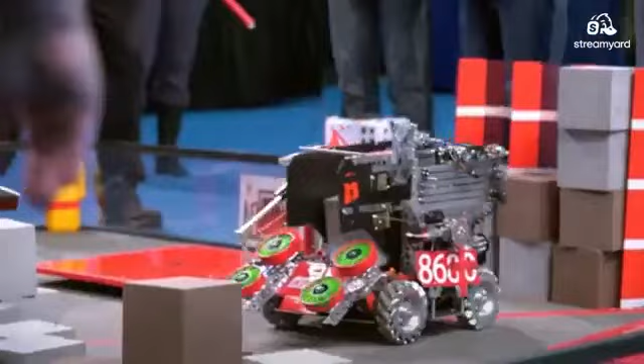Here they release a new challenge. Once you get the challenge, you figure out your game plan. Teams use a reusable kit to program robots in a variety of coding languages.

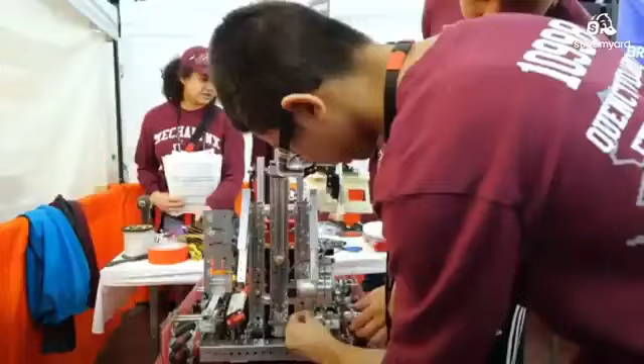Every year you also learn more and more about coding, so your code gets better and better. Personally, I do not learn by hearing about it, hands-on is just go into it. Instead of saying, oh, I know how to build this robot, I can say, I built this robot.

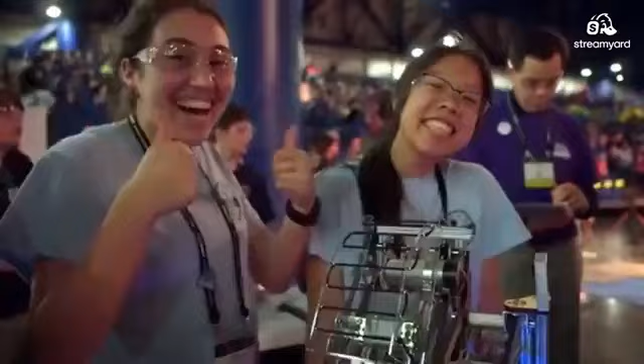In First Tech Challenge, students are developing a broad range of skills: manufacturing, hardware, troubleshooting. But there's also a lot of things you learn that you wouldn't necessarily think about, like people skills, problem-solving skills, helping one another, helping other teams.

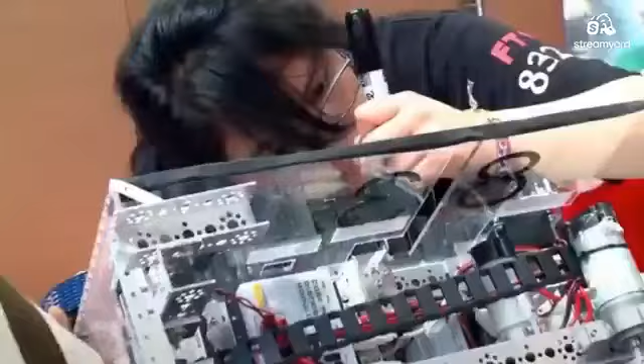The program draws so many students who just want to do the marketing, who just want to do fundraising. And that's a great thing that kids learn very early on. The model of FIRST has provided incredible opportunities for students to interact with professionals.

Whenever I asked my mentors a question, they always flipped it around and asked, where would you find the answer to that question if I weren't here? They slowly built my confidence up so much that we weren't asking them questions anymore, we were just going.

Each team has to compete at a local event, win awards at the local event, and then they're able to move on to the First Championship.

You walk into the room and there's that smell, the smell of robots. 3, 2, 1. There's different languages, different culture. It's just the best thing ever.

There are scholarships for colleges, universities, as well as technical programs. I think it's incredibly important for youth to see careers in science and engineering as a possibility for them.

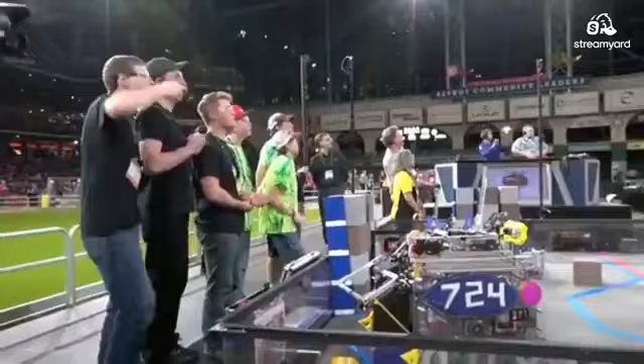First Tech Challenge is like an avenue for me to express my creativity with like-minded individuals who later become my friends through the program.

First, in one word: wow. Fun! First is inspiration. First is amazing. First is hope.

Okay, so yes, first is amazing and amazing.

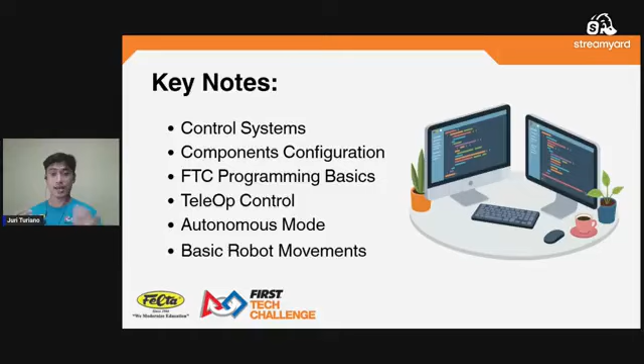I want to give you a coaching principle right now that applies to every topic we discuss today: always check for foundational understanding before advancing to the next layer. If the student does not know which port their motor is plugged into, their code will not make sense to them, even if the syntax is correct. Coaching this material is as much about diagnosing gaps in the foundation as it is about teaching new content. Keep that lens active throughout today's session.

So let's move on to control systems. This covers the hardware brain of the FTC robot, specifically the Rev Control Hub, and the role it plays in everything the robot does. A coach who deeply understands the control hub is a coach who can troubleshoot almost anything that goes wrong on the robot, because every motor, every servo, every sensor, every line of code ultimately flows through this one device.

Physically, the control hub is a compact rectangular board about the size of a thick smartphone that mounts directly onto the robot's frame. Do not let the size fool you. Inside is a real embedded computer: a quad-core ARM processor, 1 gigabyte of RAM, 8 gigabytes of storage, running an Android-based operating system. This is not a toy controller. It is a capable computing platform designed and packaged specifically for educational robotics, and it runs real software that your students write.

The control hub performs five distinct roles simultaneously, and I want you to be able to name all five. First, it is the robot controller computer, executing the op mode programs your students write in real time during competition. Second, it is reading motor encoder feedback. Third, it provides sensor interfaces, with ports for digital sensors, analog sensors, and I2C sensors, allowing the robot to sense its environment.

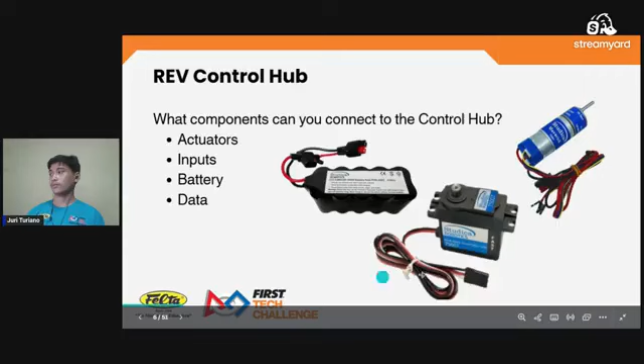So let's move on to the parts of the Rev control hub, or the port reference diagram. This diagram is one of the most practically important references in today's entire session. I strongly recommend that coaches print this diagram and post it in their build space. Students will need to refer to it constantly during both the hardware build phase and the software configuration phase. Let's walk around the diagram systematically.

On the left side of the hub, we have the motor and encoder ports—four of them, numbered 0 through 3. DC motors plug in here. The encoder cables from each motor, the thin cables that carry rotation count data, also terminate at these ports.

The port number you use here becomes the foundation of your software configuration when you create the configuration file. You will assign a name to each port number. That name must be used exactly in your code.

Along the bottom edge, we have servo ports—six of them, numbered 0 through 5, with a 5-volt power rail alongside them. Servos connect here. Unlike motor ports, servo ports do not carry encoder feedback. Servos are controlled by position signals, not by shaft counting.

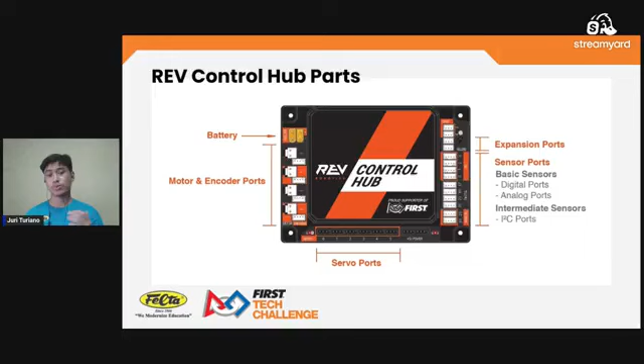Here's a coaching exercise I highly recommend. Before your students write a single line of code, sit down with this diagram and physically trace every wire on the assembled robot from its component back to its port. A student who can look at any motor on the robot and say, that is the left drive motor, it is on port 0, and it is named left motor in the configuration, and my code uses the exact name, has a complete mental model of the hardware-software chain. That mental model is what makes troubleshooting possible.

Now let's move on to the technical specifications of the Rev Control Hub. This slide lists the technical specifications of the Control Hub. You do not need to memorize these, but I want to highlight a few that have practical implications for coaching. The Rev Control Hub has a processor, an RK3328 quad-core ARM Cortex A53. This is the same class of processor used in budget Android phones. For the scale of the FTC program, this is more than adequate.

The processor is never the performance bottleneck. When students say their code is running too slow, the cause is almost always logical errors or inefficient loop structure, not hardware limitations. The Android-based operating system is important context for understanding why FTC programming tools work the way they do.

The blocks editor and the onboard Java both run in a web browser hosted by the control hub itself. You access them by navigating to a specific IP address on the hub's Wi-Fi network. This means your programming laptop does not need any special software installed, just the web browser. The Rev hardware client is the only desktop application needed.

The Wi-Fi specifications, 802.11 AC/B/G/N, support both 2.4 GHz and 5 GHz frequencies. At competition venues with many teams, the 2.4 GHz band can become congested, causing connection instability.

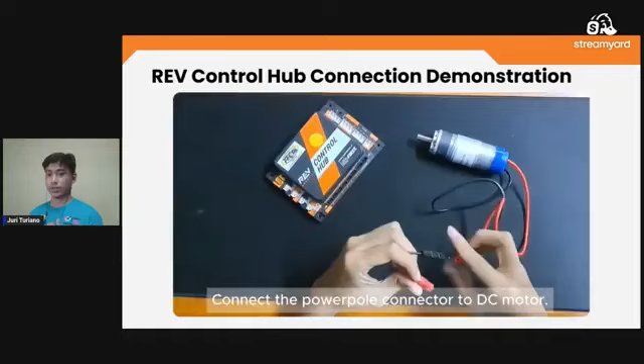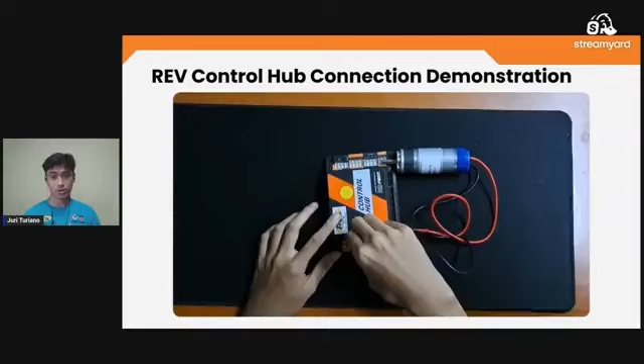As we demonstrate live, I want to highlight four specific things to observe. First, watch how the motor cable's JST-VH connector sits into the motor port. It clicks when fully inserted. That click is not just satisfying, it is diagnostic.

If there's no click, the connector is not fully seated, and the connection may be intermittent. Intermittent connections are one of the most frustrating sources of robot misbehavior during practice, because the robot works sometimes and fails other times with no obvious cause. Always click-check motor connections before every run.

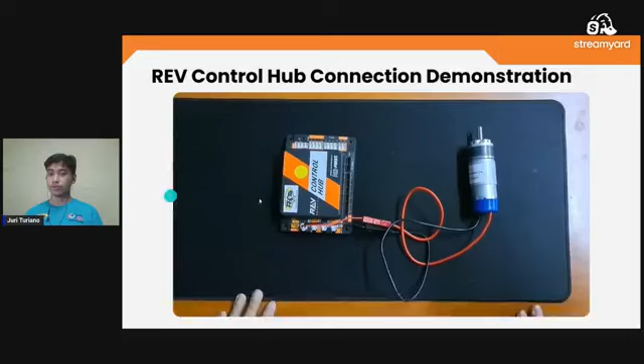Let's move on to the components configuration. This is the bridge between hardware and software, the step where you formally tell the control hub what is physically connected to it, and what each component will be called. Without this step, code cannot communicate with hardware. Configuration is not programming, but it is just as critical as programming, and mistakes here produce errors that look like programming bugs.

Let's meet the FTC Driver Station app. FTC Driver Station is the official application used to control and monitor the robot during matches. It runs on a dedicated Android phone or tablet, separate from the control hub, and communicates wirelessly over the hub's Wi-Fi network.

The driver station serves four distinct functions that coaches need to understand well. The first is the operator interface. During teleop, the two gamepad controllers plug into the driver station device via USB, and the driver station relays every joystick movement and button press to the control hub in real time. Every motion the robot makes during teleop originates as physical controller input that flows through the driver station.

The second function is program selection and match control. Before a match, the drive team uses the driver station to select an op mode, meaning operation mode, which determines which robot program they want to run. They choose between autonomous and teleop mode, initialize the selected program, and then start the robot at the match signal. Getting the sequence correct under time pressure at competition is a skill that requires dedicated practice. Many teams lose precious seconds fumbling with the driver station during the match countdown. Include driver station operation drills in your regular practice routine.

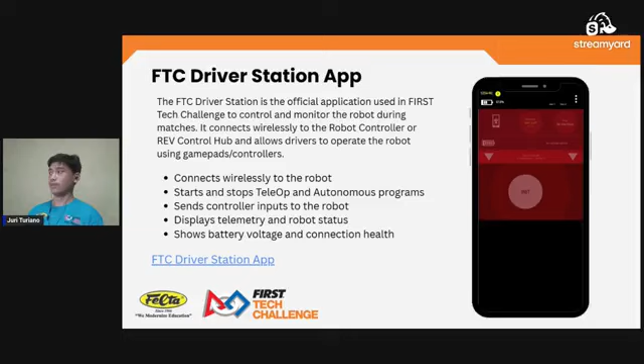At the very top of the screen is the driver station name, shown here as the 1234RC. This is the name of the control hub the driver station is paired with. At competition venues, many teams operate simultaneously. If this name does not match your robot, you are connected to someone else's robot. This is more common than you would expect at larger events. Always verify the driver station name before initializing any program.

Directly below is the battery percentage for the driver station device itself, the phone or tablet's own battery, not the robot's battery. A driver station that dies during a match is entirely preventable. Charge it before you practice and every competition.

The user 1 and user 2 indicators on the right side show whether the two gamepads are registered and recognized. A blank indicator means the controller is not connected. Always verify both gamepad indicators before match start. A drive team that begins a match with an unregistered controller has no way to control that function during the entire 2-minute period.

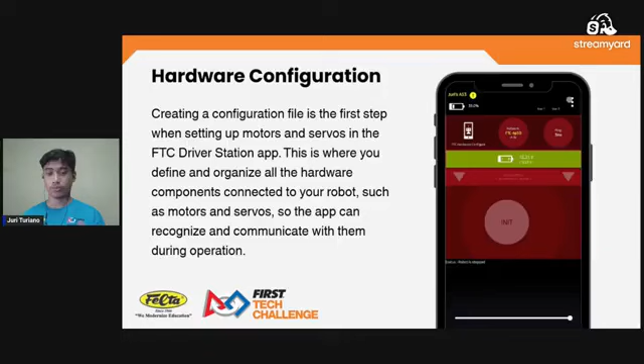So let's move on to the hardware configuration.

Let's trace the physical power path through the robot, because understanding this chain is as important for safety as it is for troubleshooting. The connection sequence is: battery connects to the on and off switch, the switch connects to the REV Control Hub. Every component on the robot—all motors, all servos, all sensors, the hub's processor itself—draws power through this chain.

The switch is a single, immediate point of control for the entire robot's electrical system. FTC rules require every robot to have an easily accessible, clearly identifiable power switch. The purpose is safety: at any moment during practice or competition, a runaway robot, a software crash, or a mechanical failure means any adult or referee must be able to cut power to the robot immediately without reaching into its moving parts. Make sure your switch is positioned accessibly, and make sure every student knows exactly where it is and how to use it quickly.

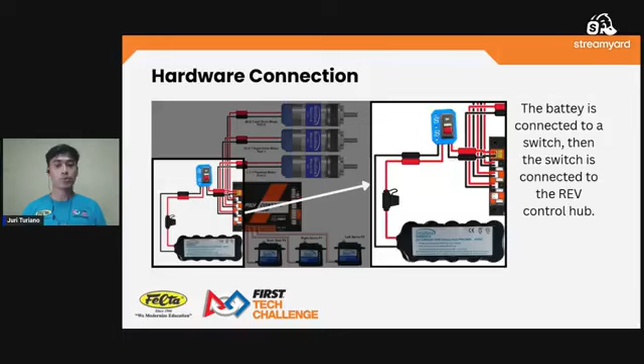Next is the servo port assignments. Three servos are used in this design. The backspin servo is connected to servo port 0, the right feed servo is on servo port 1, and the left feed servo is on port 2. These three servos control the ball feeding mechanism. The backspin servo provides backspin to game elements as they enter the shooter system, stabilizing their flight trajectory.

The right and left feed servos act as a gate. Their angular position determines whether the robot is actively feeding game elements into the shooter or holding them in the stage position. The coordination of these three servos determines the robot's scoring effectiveness.

For students programming servos for the first time, the key concept to introduce is the servo's position value. In FTC block code, servo positions are decimal values from 0 to 1. The value 0.0 represents one extreme of the servo's range, 1.0 represents the other extreme, and 0.5 centers the servo. The exact position values that correspond to gate open and gate closed for this specific mechanism are determined through testing. There's no shortcut: the student must set a value, run the program, observe the physical position, and adjust until the mechanism works as intended.

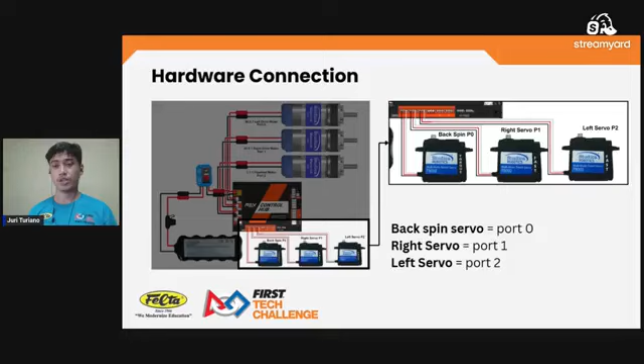A critical coaching habit to instill: every time a servo position value is calibrated and confirmed to work, write it down immediately. Calibration values that exist only in the student's memory are lost the moment that student goes home. Calibration data belongs in the engineering notebook before the practice session ends.

Now for the DC motors. The motor port assignments for the starter bot are: left drive DC motor on port 0, right drive DC motor on port 1, and the flywheel DC motor on port 2. The two drive motors on ports 0 and 1 use 50.9 to 1 gear ratio motors; the high gear reduction provides the torque needed to drive the robot's weight across the field efficiently. The flywheel motor on port 2 uses a 3.7 to 1 ratio—a fast gear ratio because the flywheel needs high rotational speed to launch the game elements at competition-level velocity.

There's an important nuance about the drive motors: they're mirror images of each other on the robot frame. This means when you apply the same positive value to both motors, one motor's physically forward direction is the other motor's backward direction. One motor will drive the robot forward while the other drives it backward, and the robot will spin in a circle.

The fix is not in the wiring; the fix is in the code. During the initialization phase of your op mode, you set one motor's direction to reverse so that the positive value commands the motor to spin in the physically forward direction. From that point on, positive power means forward for both motors, and the drive code becomes consistent and predictable. If your students see the robot spinning in a tight circle where they expect straight-line driving, a missing motor reversal is the first thing to check.

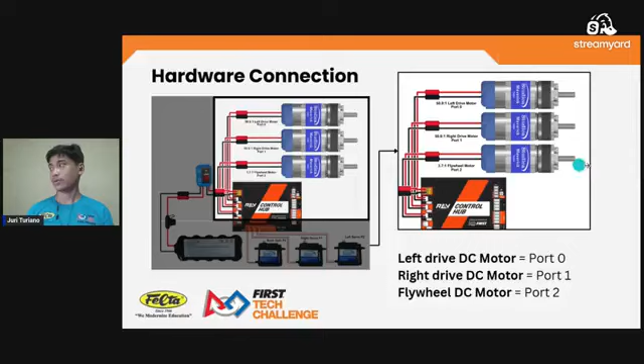So let's move on to the FTC programming basics. Our third section is FTC programming basics. This covers the programming environment your students will use, the tools available to them, then the workflow of writing code to running it on the robot. This section establishes the vocabulary and workflow that our teleop and autonomous discussion will depend on.

So this is what the robot should look like when you finish building the starter bot using the FTC Studica kit robot. The robot sits on four specialized wheels. These are mecanum wheels, identifiable by the angled rollers around their perimeter. A mecanum wheel drivetrain can theoretically move in any direction, including sideways, by varying the speed and direction of individual wheels independently. For the initial starter bot code, we used a simpler tank drive control scheme, but the mechanical capability for more complex movement is present in the hardware.

On the top of the drive base, an open aluminum frame structure houses the ball shooter. Two spinning flex wheels powered by the flywheel motor form the shooter. The game elements fed between these spinning wheels are launched outward at speed. The three servos we discussed in the configuration section control the feed gates that manage the flow of the game elements from the intake area into the shooter path.

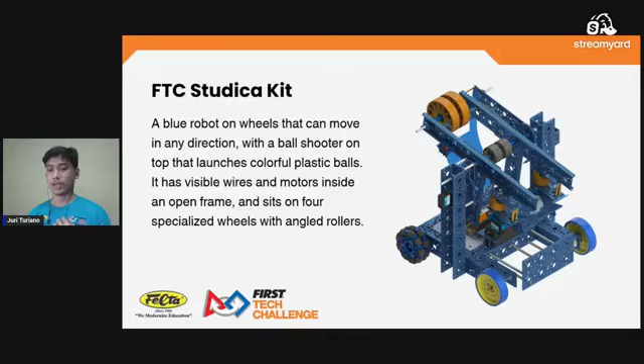First, firmware updates. It detects the connected control hub and allows you to update its firmware to the latest version in a few clicks. Running outdated firmware is one of the most common causes of mysterious robot behavior that is difficult to diagnose - unexpected crashes, communication instability, features that do not behave as documented. At the start of every season, firmware update is one of the first tasks on your team setup checklist.

Second, hardware configuration from a computer. While configuration can also be done with the Driver Station app on the phone, the hardware client provides a more comfortable interface on the laptop screen, especially for first-time configuration. Third, diagnostics. The hardware client shows detailed information about connected devices, port status, and system health. When something is not working and you cannot figure out why, connecting to the hardware client reveals the cause quickly.

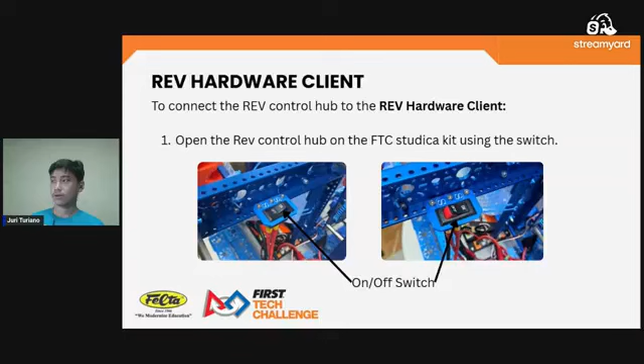Step 2: observe the status LED on the control hub immediately after switching on. The LED glows blue. This indicates the hub is booting - the Android OS is loading, the Wi-Fi radio is initializing, and the FTC robot controller application is starting up. This process takes 15 to 30 seconds depending on the hub state. Do not attempt to connect during the blue phase; the Wi-Fi network is not yet available.

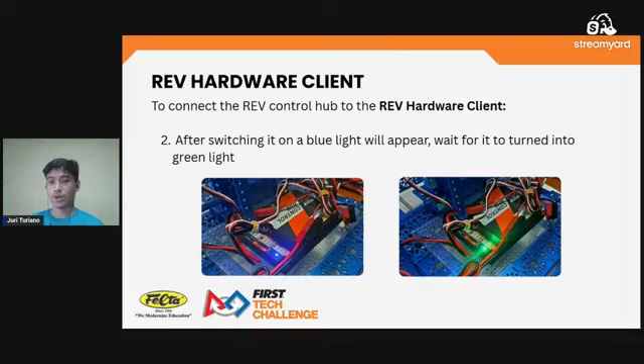Step 3: when the LED transitions to green, the hub is fully ready. Green means the Wi-Fi network is broadcasting and the robot controller is running. At this point, open the Wi-Fi settings on your laptop and look for the hub's SSID.

A network name includes the hub serial number or team assigned name. Connect your laptop to that network. Once the laptop is connected to the hub's Wi-Fi network...

The hub's network name can be changed through the Rev hardware client under the networks for the device. So step 4, after you click the control hub in the Rev hardware client, it will lead you to the configuration of the hub. For this part, we need to go to program and manage to show the robot controller console.

Next, go to the blocks tab and it will lead you to the op mode lists. To create an op mode, just click create new op mode. A modal will appear, and then you can type the op mode name, and after you put your op mode name, you can select the basic op mode for this session.

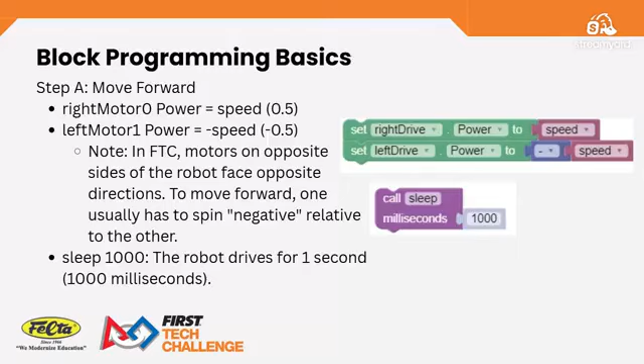If you put the right and left motors to 0, after the call sleep it will just time the movement. For example, if you put 1000, that is a 1 second movement.

Now let's move on to the teleop control. We are now entering our fourth section: the teleop control. Teleop, short for teleoperated, is the phase of an FTC match where the human drivers control the robot in real time using gamepads. For most teams, teleop is where the majority of programming effort and driver practice time is invested, because it is the longest phase of the match and it directly determines competitive performance.

In FTC, the teleop mode is run for 2 minutes after the autonomous run. So what is teleop control and why does it matter? Teleop in FTC is the game mode where the driver manually operates the robot using a gamepad, with the robot responding in real time to every input the driver makes.

In competition, teleop follows the 30-second autonomous period and lasts approximately 2 minutes. So after autonomous, it transitions to teleop mode for 2 minutes, making up the majority of each match by time.

Teleop code is structured as a loop. The code executes the same block of instructions continuously many times per second, and each iteration reads the current state of the gamepad and updates motor and servo outputs accordingly. This looping architecture is what makes the robot feel responsive.

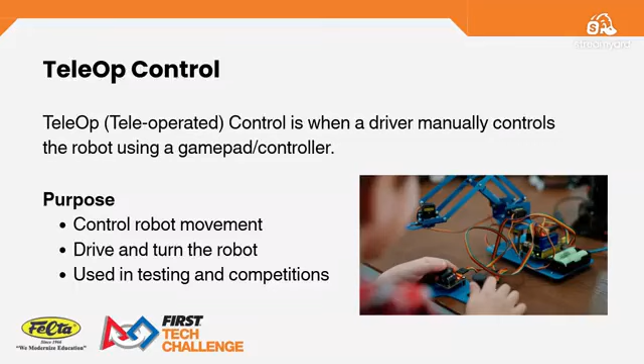Teleop also produces a rich educational environment beyond programming skills itself. Students who iterate on teleop code to improve its feel encounter concepts like input smoothing, deadband implementation, and control sensitivity, real control engineering concepts, through a hands-on immediate feedback loop.

There are two types of drive control paradigms used in FTC, each with different characteristics that suit different drivers and strategies. Let's examine both so coaches can make informed recommendations for their teams.

Tank drive uses one joystick per side of the drivetrain. The left stick controls the left motor and the right stick controls the right motor independently. Push both sticks forward and the robot moves forward. Pull both back and it reverses.

Push the left stick forward while the right stick stays neutral, and the robot pivots right around the top right wheel. The one-to-one mapping between controller and wheels is conceptually simple and easy to understand, making it the natural starting point for new programmers and new drivers.

The challenge with tank drive is execution. Driving perfectly straight requires both sticks to be pushed in exactly the same direction simultaneously, which is harder than it sounds over a 2-minute match.

Arcade drive uses a different paradigm. One axis, usually the left stick's vertical, controls forward and backward speed. Another axis, usually the right stick's horizontal or the left stick's horizontal, controls turning.

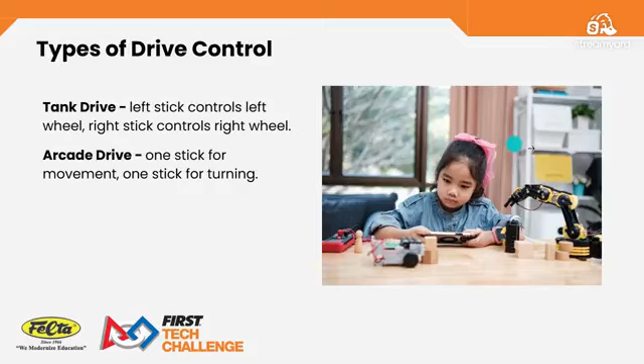So we have a common control reference, this table maps gamepad inputs to robot actions for basic drive function. Left stick forward moves the robot forward, left stick backward moves it backward.

When the right stick goes left, it turns the robot left. Right stick right turns it right. These four inputs cover all the drivetrain locomotion in an arcade drive configuration.

This table abstracts away what our students will encounter immediately in the code: the joystick value convention. In FTC, every joystick axis returns a floating point value between negative 1.0 and 1.0. The center rest position is 0.0. Pushing the left stick fully forward returns a value of negative 1 on the y-axis, not positive 1.0.

This inverted convention surprises nearly every new student. It is a remnant of how Android reads gamepad hardware, and it is why teleop code that uses the joystick Y value directly, without negating it, drives the robot backwards when the student pushes forward. Understanding this convention is essential before students write their first teleop code.

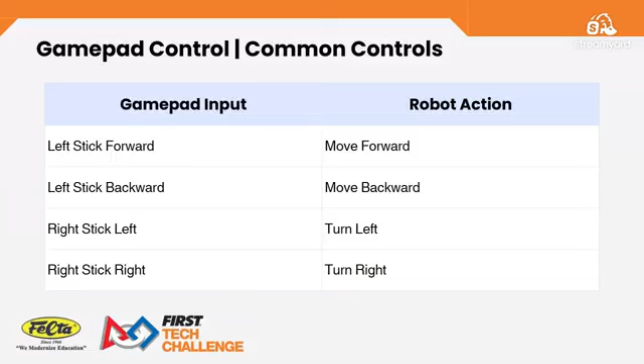It also gives the drive team an opportunity to provide input on the layout before it is locked into code. A controller mapping diagram, a simple sketch of a gamepad, should be documented for every practice session. New drivers cannot be expected to memorize the full control scheme immediately. A printed reference card solves this problem.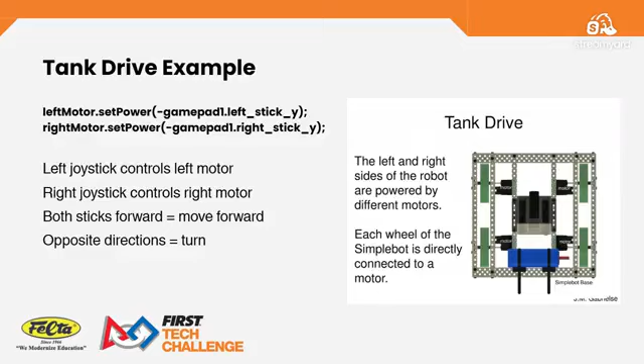If both sticks move forward, the robot will move forward. If the left joystick moves forward and the right joystick moves backward, the robot will turn in place, or it will rotate.

A great tip is to have two controllers, because you can connect two controllers in the FTC driver station app. The first controller is for driving only, for the FTC starter bot, and the other controller is for the gates, the servos, and the flywheel.

That way, two students can use the two gamepads, so that it would not cause confusion when the competition or match starts.

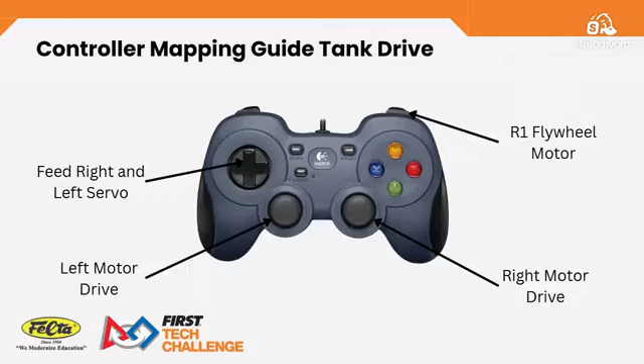Okay, so let's move on to the autonomous mode. Our fifth section is the autonomous mode.

In FTC competition, autonomous is a 30-second period at the beginning of each match, where the robot operates entirely without driver input, running on pre-programmed instructions. It is technically the most demanding aspect of FTC programming, and it is where investments in good code quality most directly translate into competitive points.

So, what is autonomous? Autonomous mode is exactly what the name says. The robot operates autonomously - you just click the start button and can completely lift your hands off the robot, so it starts automatically, or autonomously.

The robot operates autonomously without any human input, executing a sequence of instructions written in advance by the programming team. The drive team initializes the autonomous program before the match start signal fires, and from that moment the robot performs entirely on its own. No driver can help it, correct it, or intervene.

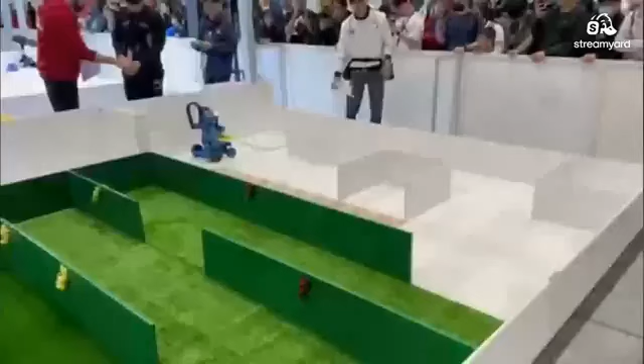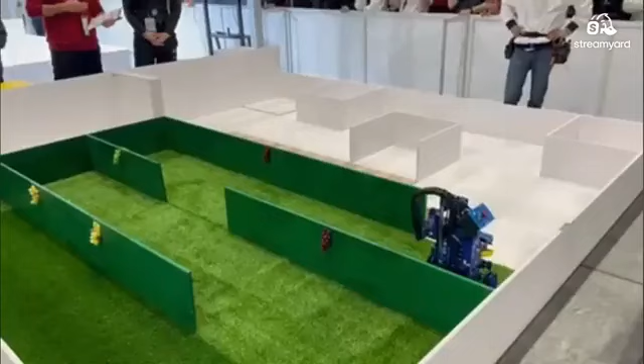So this is another type of competition, World Skills, but it uses the same robotics component. It's a Studica, but I just wanted to show you how the autonomous works. So the players or the contestants just push one button so that the instructions that the programmer has coded are then translated into the robot's movement.

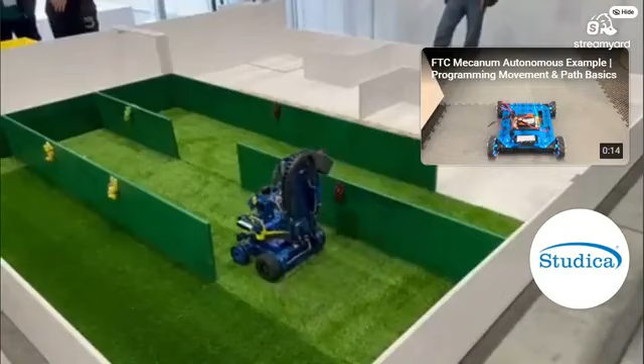Okay, so that's the example of the autonomous mode. Let me just explain what happened in the video. So notice the video link here provides a real-world view of what a functional autonomous routine looks like in practice.

Notice the deliberate pacing. The robot does not rush. Each movement is clean and deliberate. Forward movement stops completely before the turn begins. The turn is executed to a specific position, and the next movement starts from a known stable state.

That measured pacing is a deliberate programming choice that sacrifices raw speed for reliability. A routine that completes every action predictably is worth more on a full competition day than a faster routine that occasionally misses a target or ends in an unexpected position.

Also notice the absence of any correction. The robot does not adjust, re-aim, or respond to anything in its environment. It simply executes its sequence. If it drifts slightly during a forward drive, it continues with that drift. The only way to improve the accuracy of this routine is to go back to the code, adjust timing or power values, and iterate again. That cycle of observe, adjust, test, observe is the engineering process in miniature.

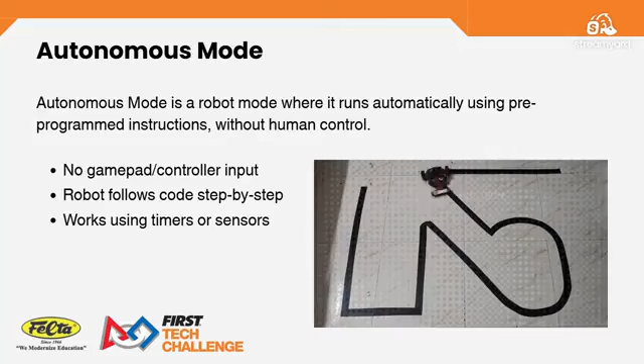So let's move on to the final section of the basics of this session, the block coding for robot control. It is the basic robot movements. This section grounds everything we have discussed about programming in the physical mechanics of how motors produce motion. A programmer who understands these mechanics can predict what their code will make the robot do before running it, and that predictive ability dramatically accelerates the iteration cycle.

Basic robot movements are the fundamental directions a two-motor differential drive robot can perform. There are five: forward, backward, left turn, right turn, and pivot turning.

Forward and backward are the simplest. Both motors spin in the same direction at the same speed. The robot translates without rotating. Forward means both motors in the positive direction. Backward means both motors in the negative direction.

Left turn and right turn are achieved by driving one side faster than the other, or by stopping one side entirely. When the left motor slows down or stops and the right motor continues, the robot arcs or pivots to the left. The degree of curvature depends on the speed differential.

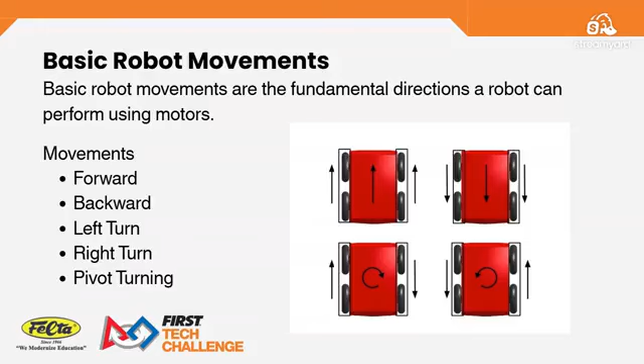How do motors control movement? Commonly in FTC, both motors should be positive to move forward. But in the starter bot with Studica Rev, the other motor, or the right motor, either way, is supposed to be negative so that it can move forward or backward.

For turning, you can use pivot point, or turn left or right. For example, you need to stop the right motor and then move the left motor to turn right, or you can stop the left motor and move the right motor to turn left.

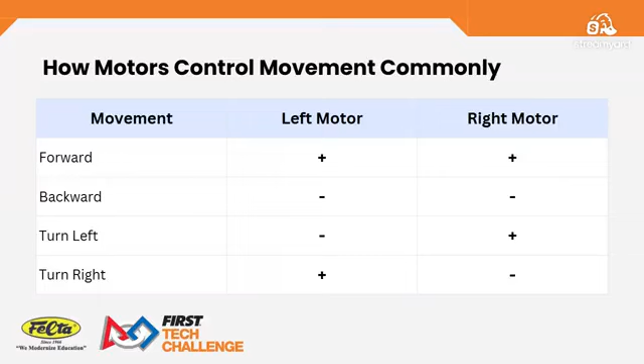Here's an example of a diagram of how the motors control movement. For a straight turn left, you need to stop the left motor and then move the right motor forward so that it turns to the left, because only the right motor is active. Also, for a turn right, you can stop the right motor and then make the left motor move so that it will turn to the right.

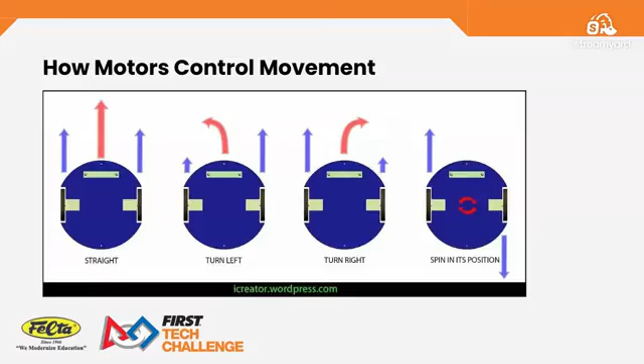The pivot turn is when both motors are active but run opposite to each other. So for example, the left motor is moving forward while the right motor is moving backward, or vice versa. In regular pivot turning, one motor stays still and the other motor moves.

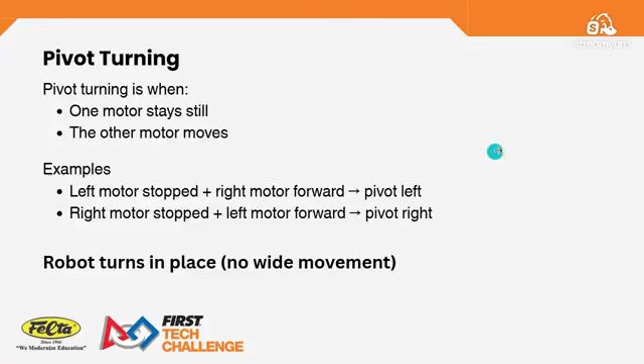For the example code of the timed forward movement, I'll explain what's in this block code. We have a function or wrapper called 'runOpMode', and the mode name is 'practice autonomous'. I created a variable called speed and set it to 0.5, or 50% robot speed. Then I put a call to 'wait for start' so it doesn't automatically run the motors when I click the init button on the FTC driver station app.

So I set the right motor's power to a positive speed of 0.5 and the left motor's power to negative 0.5 so that it moves forward. Then I call sleep for 1000 milliseconds so the motors run for 1 second, and then I set power again to 0 so that after 1 second the robot completely stops.

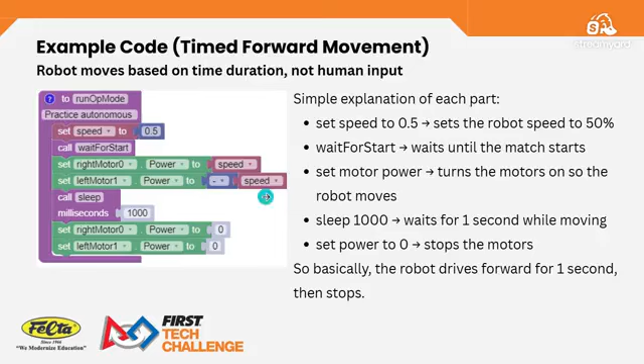Here's an example of the move forward. Let me play it again so you can see it, because it happened so fast.

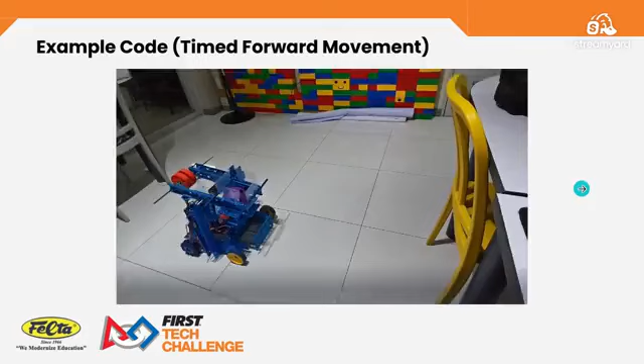For another timed movement, I created a code that makes the robot run in a square shape. I use the same code, but I also use a loop block that repeats 4 times. So it says 'repeat 4 times do', and then here's what's inside the loop block.

I put the forward movement again. In the starter bot and FTC, the other motor should be opposite so that it moves forward. For example, the right motor is at positive speed and the left motor is at negative speed. Then for accurate movement, I put a call to sleep for 1000 milliseconds, or 1 second, and then put a stop or motor stop movement.

So I put the 0 on both motors, and then another sleep to 1.3 seconds. And then in this part I created a turn.

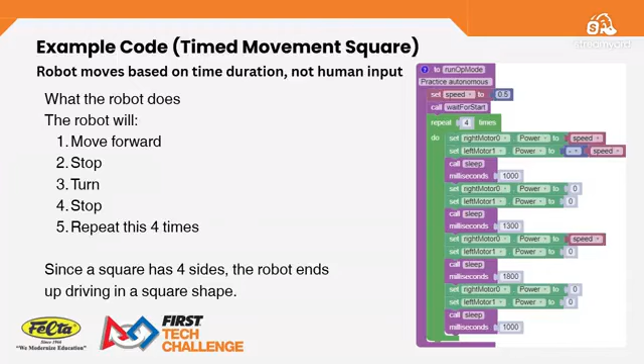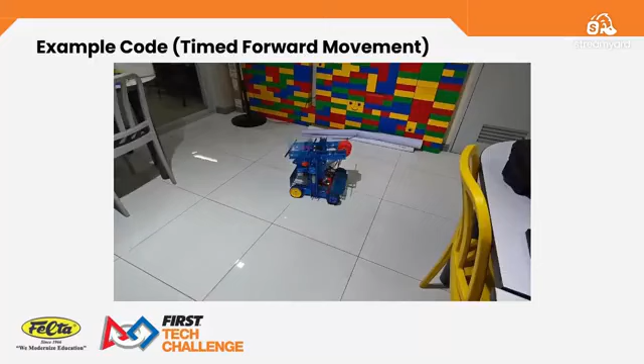So this is the example of it. In this example, I use the left motor to move to the right because we have a limited space in here. So that is actually it.

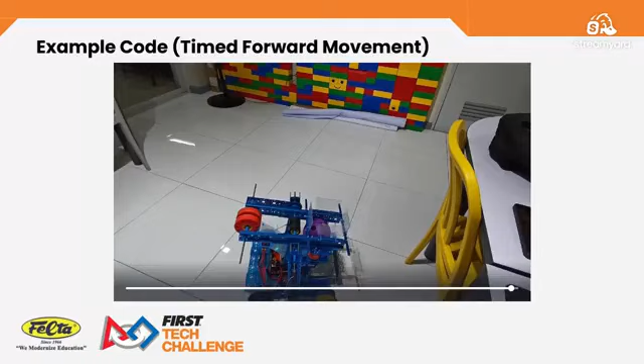...mapping that connects physical components to software references. We installed the REV Hardware Client, connected the hub wirelessly, and set up the programming environment. We analyzed tele-op code that maps joystick inputs to motor outputs in a continuous loop, and we decoded 2 autonomous programs: one simple forward movement, and one complete square path, block by block.

So again, I will share with you the quote by FIRST: we don't use kids to build robots, we use robots to build kids. So every concept we covered today, every block of code, every moment of troubleshooting students will experience this season - all of it is in service of building the next generation of engineers, problem solvers, and collaborative thinkers. That is the real work of FTC coaching. Thank you for your time and dedication today, and I look forward to seeing you on our next live session.

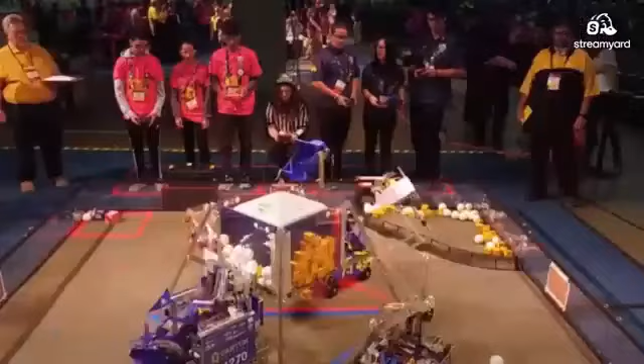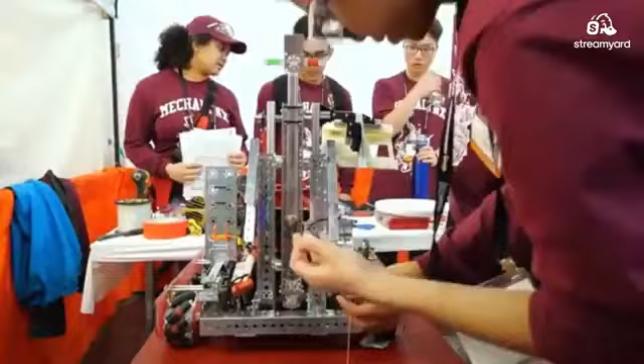Challenge challenges kids ages 12 to 18 to program, design, build, and compete with robots. First Tech Challenge is one of 3 engaging FIRST programs. Every year they release a new challenge. Once you get the challenge, you figure out your game plan. Teams use a reusable kit to program robots in a variety of coding languages. Every year you also learn more and more about coding, so then your code's gonna get better and better. Personally, I do not learn hearing about it, but hands-on is just go into it. Instead of saying, oh, I know how to build this robot, I can say, I built this robot.

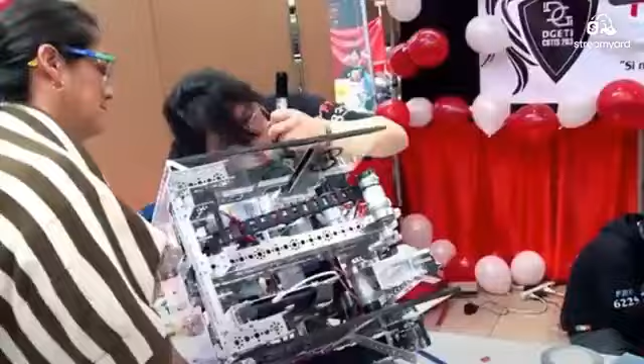In First Tech Challenge, students are developing a broad range of skills - manufacturing, hardware, troubleshooting, but there's also a lot of things that you learn that you wouldn't necessarily think about: people skills, helping one another, helping other teams. The program draws so many students who just want to do marketing, who just want to do fundraising. And that's a great thing that the kids learn very early on. The model of FIRST has provided incredible opportunities for students to interact with professionals.

Whenever I asked my mentors a question, they always flipped the question around and asked, where would you find the answer to that question if I weren't here? They slowly built my confidence up so much more to a point where we weren't asking them questions, we were just going. Each team has to compete at a local event, win awards at the local event, and then they're able to move on to the FIRST championship.

You walk into the room and there's that smell - the smell of robots. There's different languages, different cultures. It's just the best thing ever. There are scholarships for colleges, universities, as well as technical programs. I think it's incredibly important for youth to see careers in science and engineering as a possibility for them. First Tech Challenge is like an avenue for me to express my creativity with like-minded individuals that later become my friends through the program.

FIRST in one word: wow. Fun! FIRST is inspiration. FIRST is amazing. FIRST is hope.